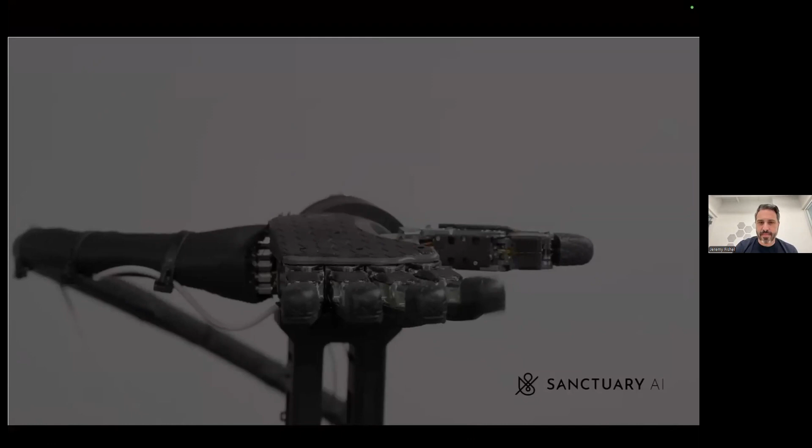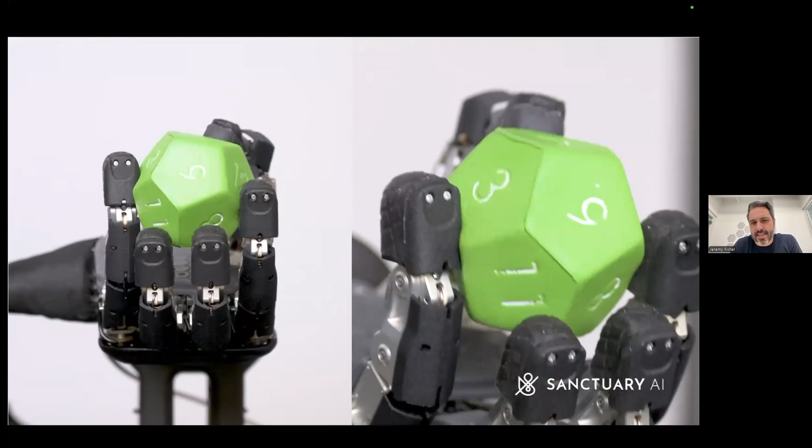We can. Okay. So at Sanctuary, we've been continuing a lot of that thread, driving durable tactile sensors and really studying the relationship between system capabilities and how those systems perform and advancing dexterity in those directions. So I have a few videos to share. This is our hand, our third generation hand. Very anthropomorphic design, very human-like kinematics, and has the right kind of power density that's similar to the human hand.

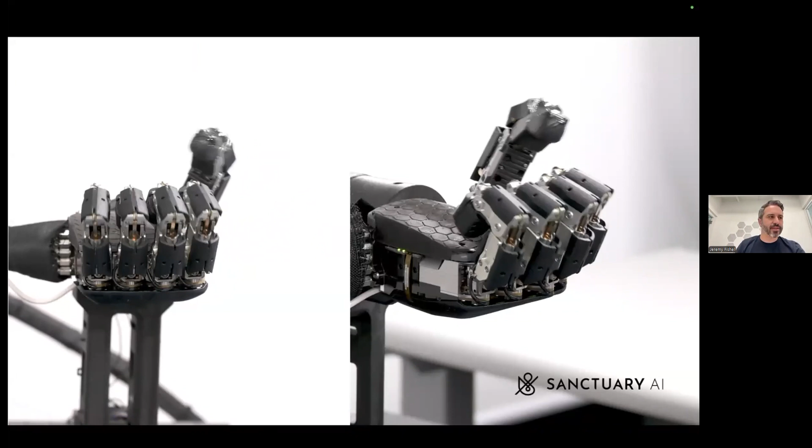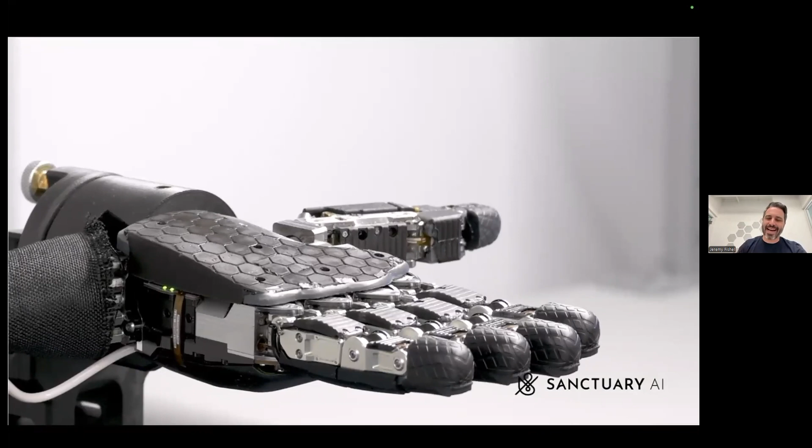Very important for in-hand manipulation, as we're demonstrating here, that some of our engineers have worked on. It can do a lot of things the human hand can do. This has been a critical tool for us to study the relationship between these features, degrees of freedom, speeds, and strength, and how they relate to performing tasks humans do with their hands. That's really a big philosophy of our company: we want to be able to do the kinds of work people can do with their hands. So lots of great stuff we can share about that.

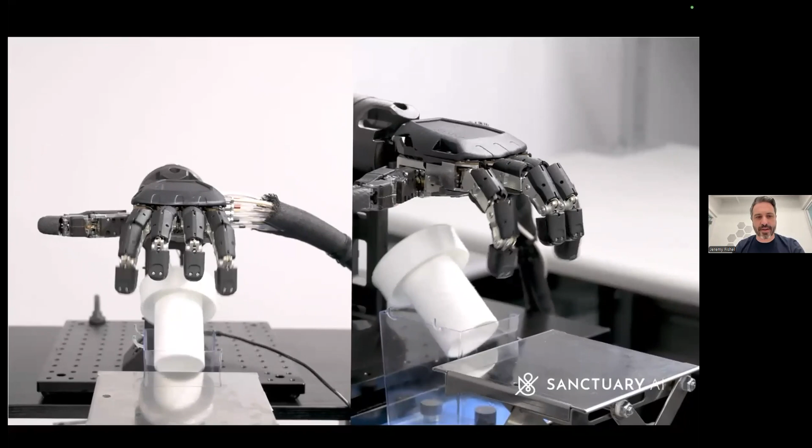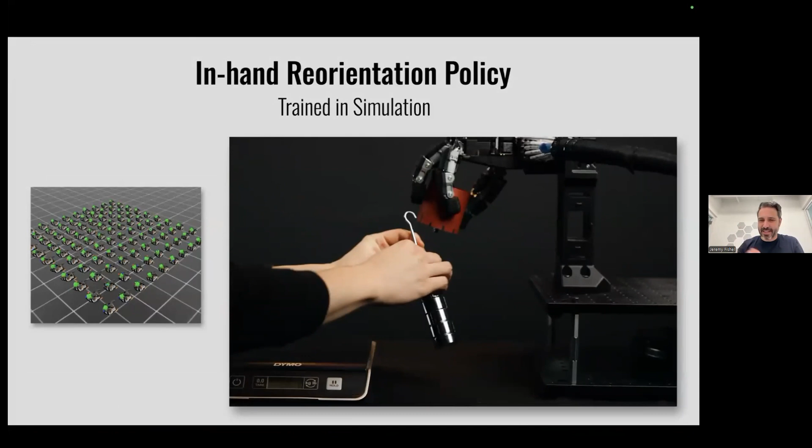One thing I think is very exciting work we've done lately, and I'm glad I get to talk over this video, is this in-hand manipulation type task. We trained this in simulation, and we're doing this rotation with actually 500 grams of weight. It doesn't sound like a lot - I remember seeing this the first time and saying, that's just 500 grams, that's not too difficult. But if you have access to weights, I'd encourage you to pick up a 500-gram weight and try this task. It's actually incredibly difficult, and I'm really proud of this performance. I can barely do it with 1 kilogram, and at 2 kilograms it's virtually impossible.

So we're really focusing on not only how can we be dexterous, but how do we have the power of the human hand? There's really a ton of conflicts in having many degrees of freedom and delicate manipulation along with power, which is something the human hand does an amazing job of.

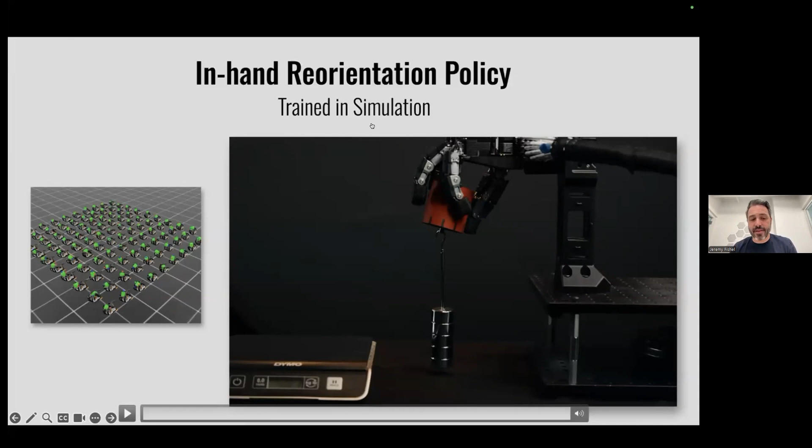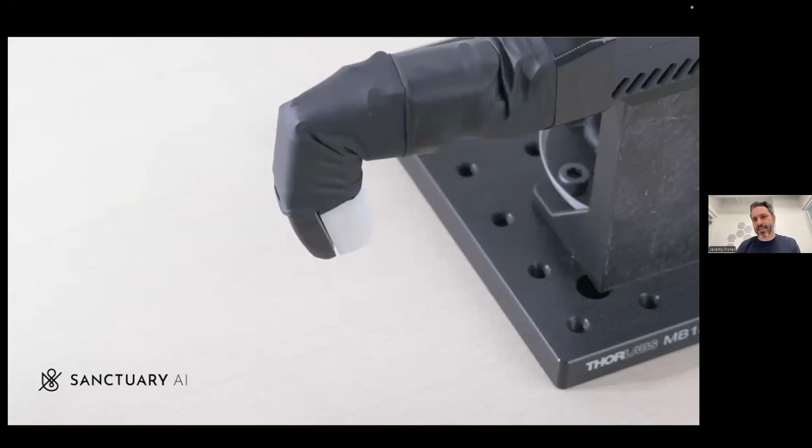Another thing, given my background, that we've focused on a lot is tactile sensing. I made the BioTac at SynTouch, which is a very biomimetic sensor. Most of the group's probably seen the green fingertip on various robot systems. While that system is very capable and can sense force, vibrations, and temperatures the way human skin can detect, it wasn't very durable. So recognizing there have been a number of amazing sensors developed that haven't been commercialized or industrialized in any significant capacity, we've really focused on the durability and compliance of these systems while still maintaining that delicacy.

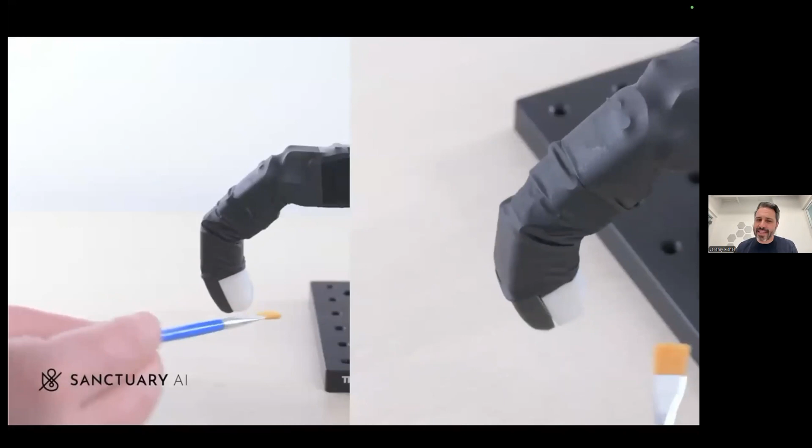So you can see we're able to delicately touch a domino without knocking it over - another task that's very difficult to do. If you close your eyes and try to touch a domino and not knock it over, you need that sensitivity that allows responsiveness too. This is one of our prototype fingers that's going to come out in a future generation hand.

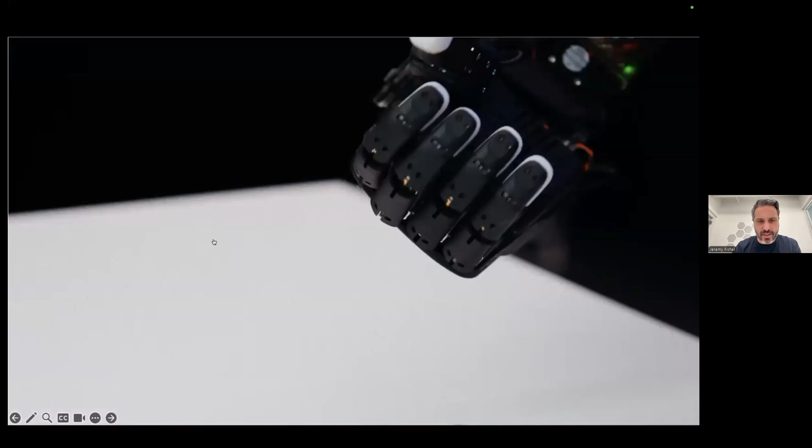We've got lots of great videos on touch. Let me let some stuff play in the background.

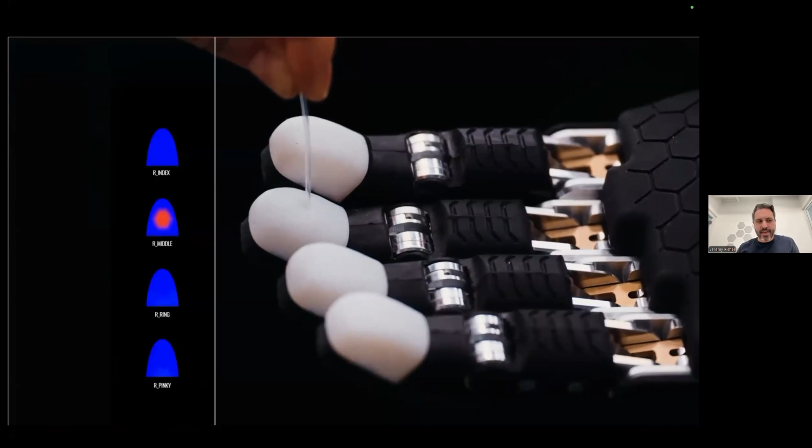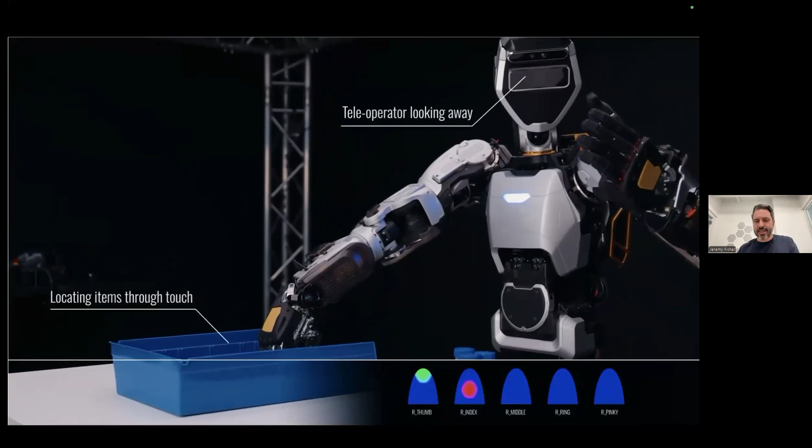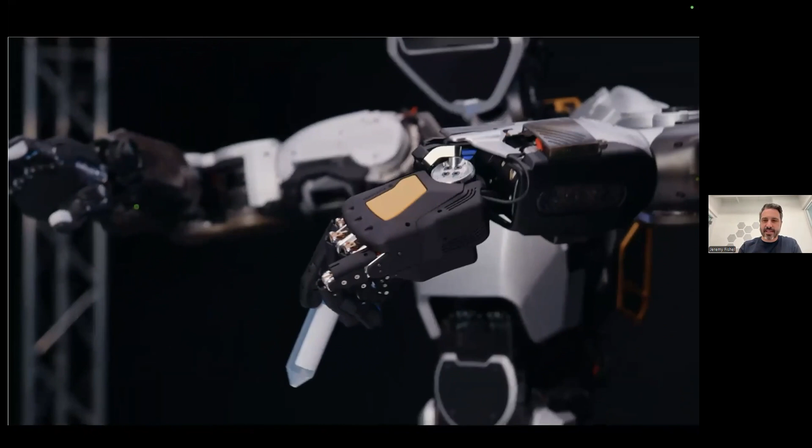As I mentioned earlier, our focus has really been on durability, compliance, and sensitivity. Touch is a very critical sense for being able to react to what we're interacting with. I've always thought of vision as a planning sense - you see everything in your environment and decide what you want to do with it - but touch is for adapting to uncertainties. Is the object slipping? Do I need to change my grip? Can I confirm my grip and move on to the next thing? Or how is in-hand manipulation proceeding? So really what we're seeing is touch is very critical for speeding things up. If you don't have this tactile sense, you make a plan, and if something goes wrong, you have to stop and make a new plan. Whereas with a sense of touch, you can react and adapt on the fly the way people do.

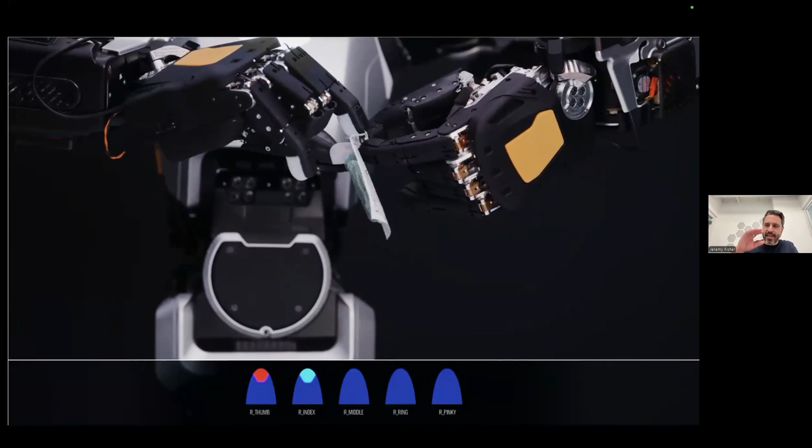Our focus at Sanctuary is on the tremendous range we see in human hands, between being delicate enough to do small things, and powerful, like the high grasp force we can attain with our hand. Getting that in one package is an incredibly difficult challenge, and that's been our focus: we want the delicate tactile sensing to react to small events, yet have a lot of power behind it too. We've got our hydraulic actuation that gives our high degree of freedom hands the power that gets much closer to human hands while maintaining that delicacy.

This is my favorite video. We've been putting tactile sensors on robots and doing teleoperation for almost six years now, and we're always seeing this immersive connection with touch. This is a reaction from one of our engineers flying the robot, the first time we put the sensors on it. She's experiencing them for the first time. I hope the audio plays.

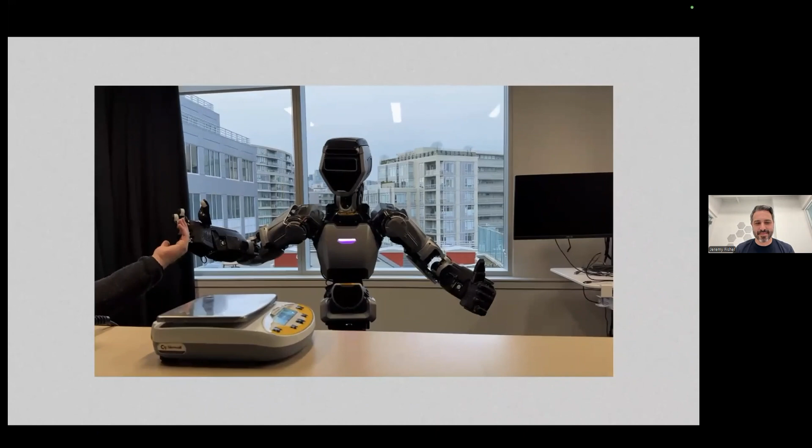Oh, I have touch sensors. Yeah, are they working right now? I can't tell. Oh, yes, they are.

That's crazy - and we see these reactions all the time. It gives this sense of connection. It makes these robots more intuitive to control and manipulate objects with, and it's such a critical sense. So we're really excited to be working with a company that shares our vision here: we need touch, we need power, we need these kinematics to replicate all these amazing things our hands can do.

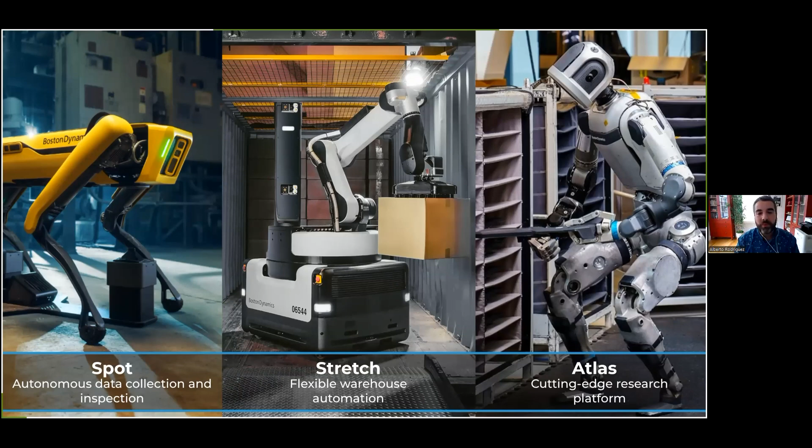All right, so let's see, just a quick one-slider background of Boston Dynamics. There are basically 3 projects that dominate most of what Boston Dynamics does. Spot, which is a product that you can buy, and it's mostly focused on autonomous data collection and asset inspection. So you can think of Spot as a robot that walks around, let's say a factory, it could be other environments. It just records what's happening and it sends warning signals when something looks off, for the most part.

Then Stretch is also a product you can buy, and it's a robot that is focused on case handling. Today, it's mostly focused on the deployments we're doing on truck unloading, but extending the range of types of workflows that it can handle. And then there's Atlas, which is what I'm going to discuss a little bit more today, which is our frontier research project, looking in the past mostly focused on mobility, and for the last 2-3 years transitioning into mobile manipulation.

And before going into more detail of the type of research that Atlas is doing in dexterity, I just wanted to have one slide as to why dexterous manipulation, with just one case example of mobile manipulation in manufacturing.

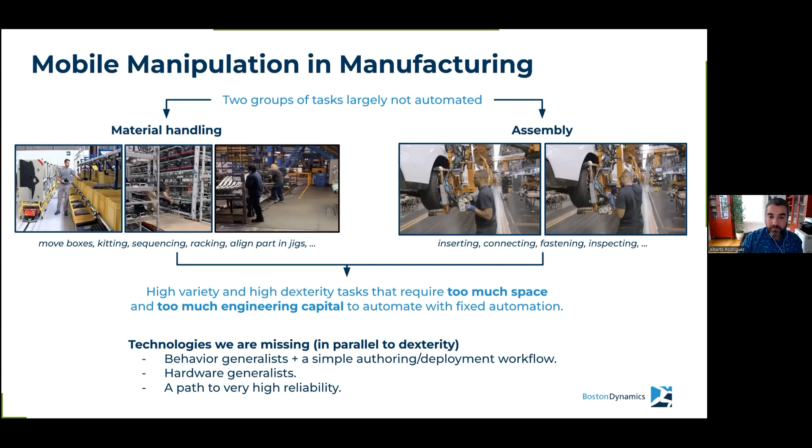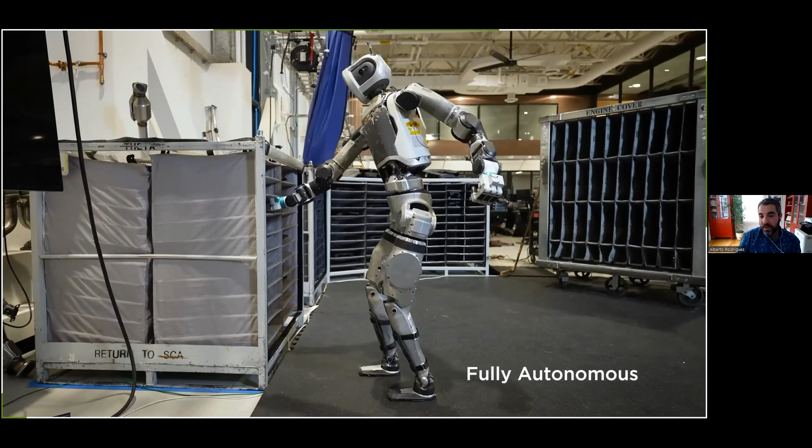So what is Boston Dynamics doing in this space? Here I just put a video which you might have seen on YouTube. This is Atlas executing one particular workflow for material handling. This is called sequencing. There's these input fixtures with different varieties of parts, this one is an engine cover, and this is a fixture where it's inserting it, where each one of these slots gets associated with a car in the assembly line in order. So this workflow is responsible for making sure that the order in which the parts are inserted in the output fixture that will be rolled into the assembly line is exactly the same as the cars that are going to be assembled in order.

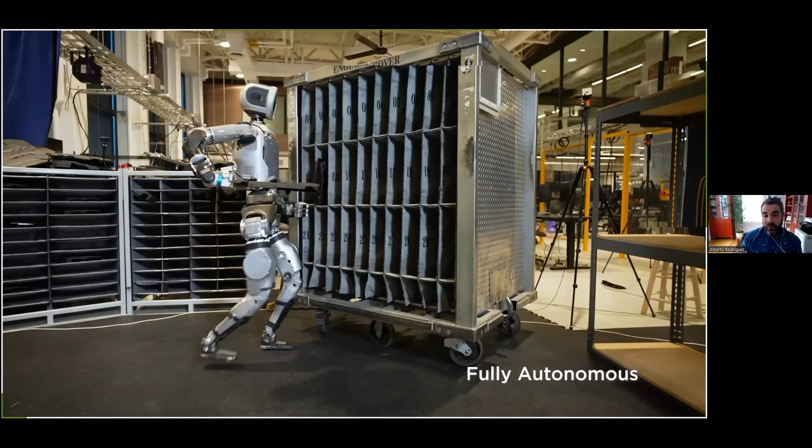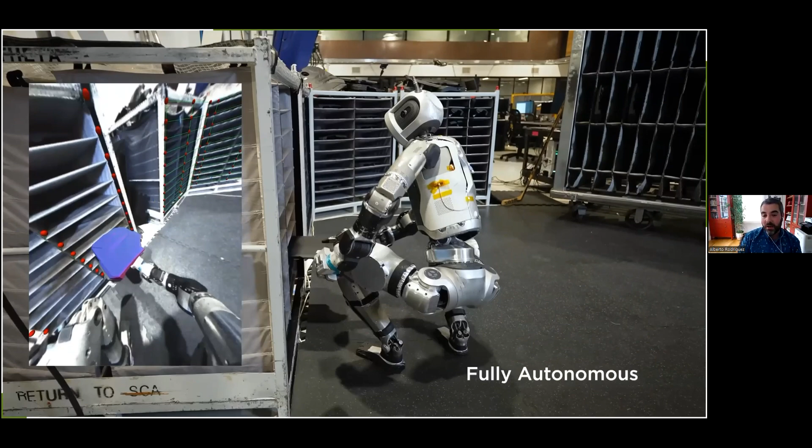So we've been building behavior architecture that is capable of executing tasks like this, pick and place behaviors with a certain degree of reliability. But really what I wanted to discuss today is where we're going next, where we think the next push is to increase the generality of the behaviors that Atlas can do, in particular in the space of dexterity.

For the most part, I would say there's three main threads that we're pushing on: simulation at scale for reinforcement learning, whole body teleoperation for imitation learning, and grippers with tactile sensing. I'll go into just one slide on each one of these.

On the gripper side, just to follow up from Jeremy's presentation, we've taken a slightly different approach. Instead of starting from a humanoid form factor, we've been interested in growing incrementally the degree of dexterity of the gripper as we recognize that we need more dexterity. At the same time, we're trying to maintain a certain degree of reliability and strength to support the kinds of tasks we want Atlas to do with high loads, heavy objects, and high repetition, for example data collection at scale.

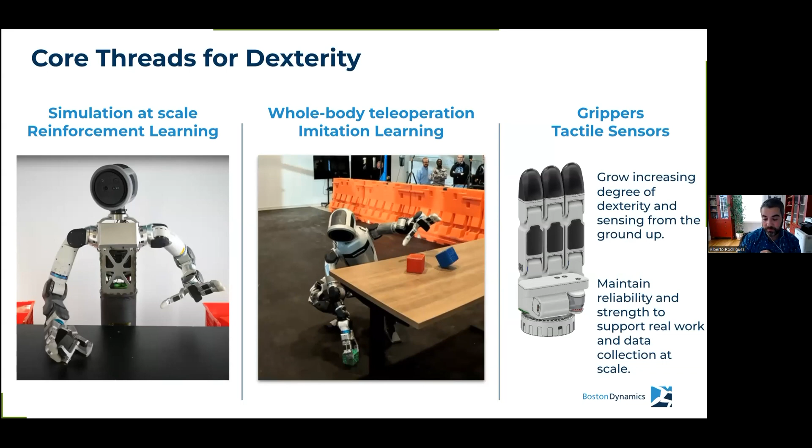Here's one slide on the work we're doing on reinforcement learning. Here's a demonstration of a policy trained in simulation that shows significant generalization to grasping objects. None of these objects showing up in front of Atlas were part of training. It's been trained on hundreds of objects, but none of these were part of the training. And it operates directly from RGB stereo, so there's no prior knowledge of the geometry, appearance, or mass of these objects. It all comes directly from either visual or proprioceptive feedback.

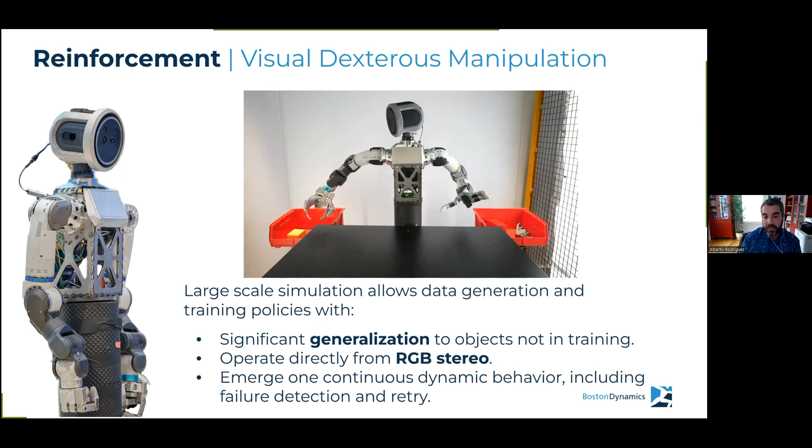One of the things I am particularly excited about is that through training these policies at scale, we do see the beginning of emergence of continuous dynamic behaviors that do not separate between pre-grasp, grasp, and lift. Things like failure detection and retry emerge when you push these at scale. So that's one core thread.

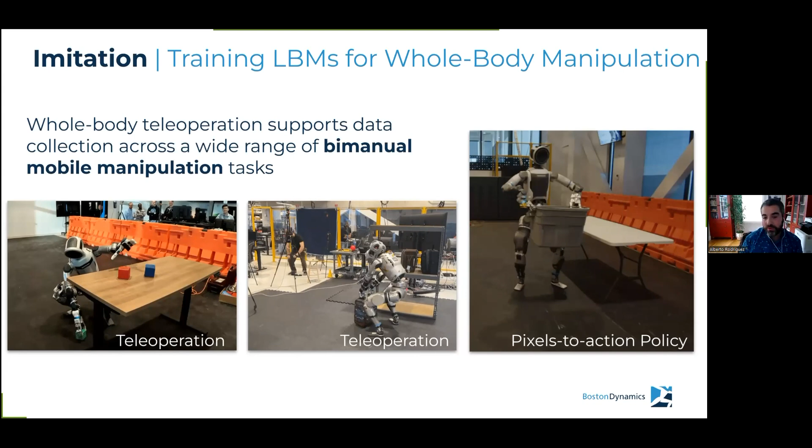The second thread, which we think is essential to make progress on dexterity, not just at the hand level but at the whole body level, is enabling whole body teleoperation that supports data collection across a wide range of bimanual mobile manipulation tasks, including things like crouching to pick up something from the ground, or lifting something heavy using both hands at the same time to do regrasps or lift a heavy object. Here I show two examples: on the left, a teleoperation system, and on the right, an example of a policy trained from data collected from that teleoperation system.

All right, I think that's my last slide.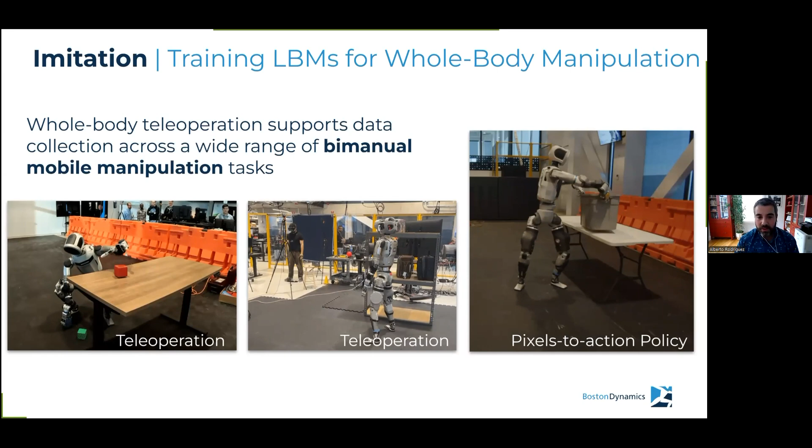Luis, Apptronik has been in the news for its recent success in raising $350 million, and more broadly there have been enormous investments in humanoids in recent years. We would love to hear more about your work within this space.

Thank you, Brenna. Thank you, Kevin. Pleasure to be here with esteemed colleagues. Indeed, Apptronik has been a story of success and good timing. I'm very pleased to be here with other colleagues that are equally, if not more, successful, all of us pushing this wonderful market forward.

So, if you don't mind, I'll share some slides. You might know me for having spent the last about 25 years in the area of whole body control of humanoid robots, both as an academic and as original co-founder of Apptronik, where now I am somewhere between business development, fundraiser, and innovation advisor.

The company indeed started in 2016. It started selling components - that was our vision at the beginning, but clearly margins were low. About 4 or 5 years later, we decided that systems, in particular humanoids, as strange as it sounded at the time, was going to be our market.

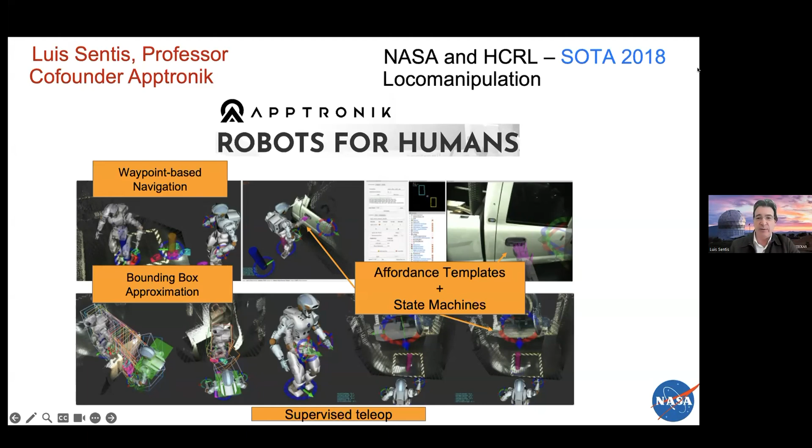It starts with NASA, Johnson Space Center in particular, where whole body manipulation was the most important accomplishment that we could have out of the DRC. What we see here is movies and renderings.

Pre-COVID, about 2017, 2018, they are highly scripted, nonetheless pretty impressive. Using affordances, there's not a whole lot of autonomy except maybe some of the walk, semi-autonomous. But that was already a feat.

One important thing to notice is that out of 33 runs of this task, it was opening a door of a car, finding a bag and zipping it. No, it was not unzipping it. It was putting it in a containment vessel in case they had a bomb, and so on and so forth.

We had 33 runs, about 30 minutes each of them, and we were successful in about 57% of them, which is fairly low. The rest of them were failures due to falling and unrecoverable walking situations, and you can go into state estimation drift and so on and so forth.

So failure rates, that's again 2017, 2018, were high. I'm gonna argue that they're still high today. And companies like Apptronik and others here are here to respond to these, turning this into a product. And turning this into a product means that we can operate with way more reliability.

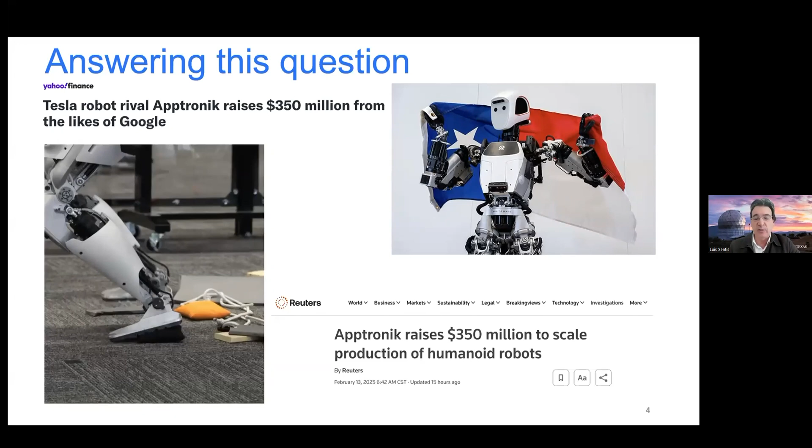A lot of the product and engineering is put now on testing, verifying, deploying, robustifying the algorithms of all sorts, whether it's machine learning algorithms or optimization-based algorithms. And I believe that it's going to make things much more successful.

Why is there excitement? Although they have limited manipulation capabilities, even tote manipulation, totes are the kind of things that you see here on the right, on the bottom right side. Those are huge. Box manipulation are huge.

And we see a lot of successful unicorn companies, not only in the humanoid side, but also on the industrial arm side, companies like Contoro and Dexterity and Covariant and so on and so forth.

Where manipulation really takes real shape is seeing the demographics and seeing that we're going to have about 1 billion people age 80 plus with mobility problems. That makes home really, really appealing.

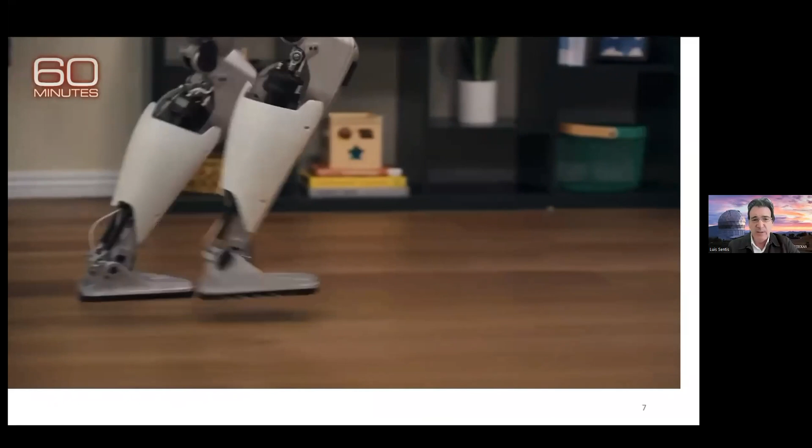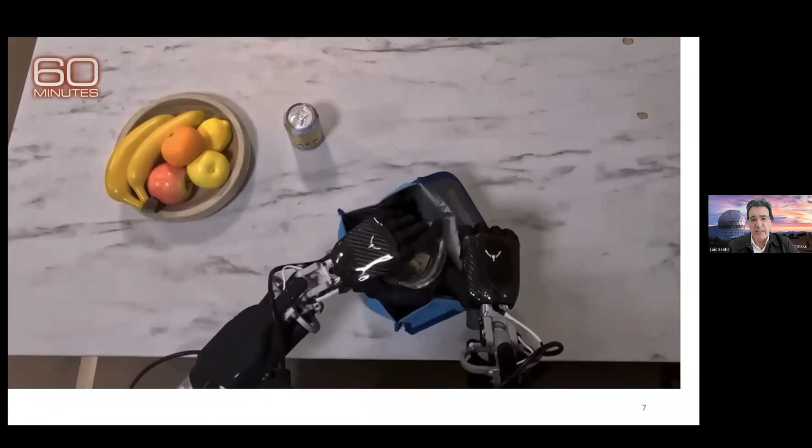And at home is where we see multi-finger manipulation really thriving. This is a recent video in 60 Minutes with Demis Hassabis and our partnership with Google DeepMind. And you can see that focus and that idea of achieving multi-finger manipulation as a frontier in humanoid robotics.

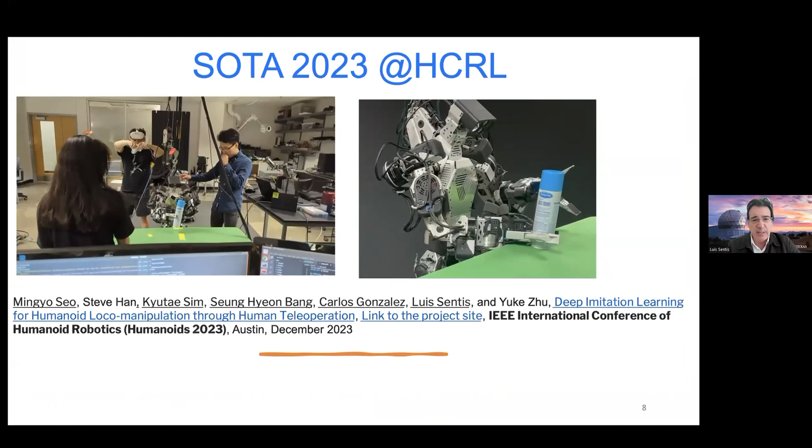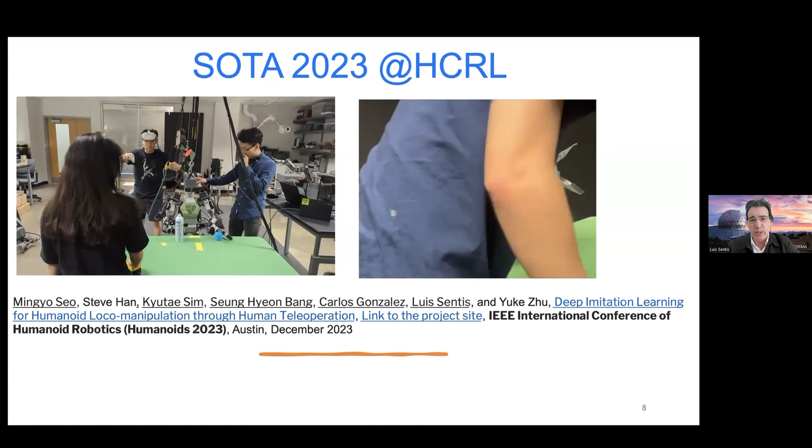Going through the time history, and I'm now switching a little bit more to my academic role. This is research we conducted with Yuke Zhu, who's now leading the GR00T project at NVIDIA, on using supervised learning, imitation learning, with any sort of interfaces and being able to achieve pretty successful multi-arm, dual-arm manipulation, long horizon or mid-horizon kind of tasks.

And that was achieved by a combination of—often supervised learning or reinforcement learning is criticized about the lack of generality. They have robustness, but not generality. And in this case, we create abstractions.

They are not necessarily aware of the entire embodiment. So we have on the left side a supervised learning approach, and then on the right side, the kind of a more classical optimization, whole body control approach. By combining both of them, we achieve robustness and cross-embodiment learning.

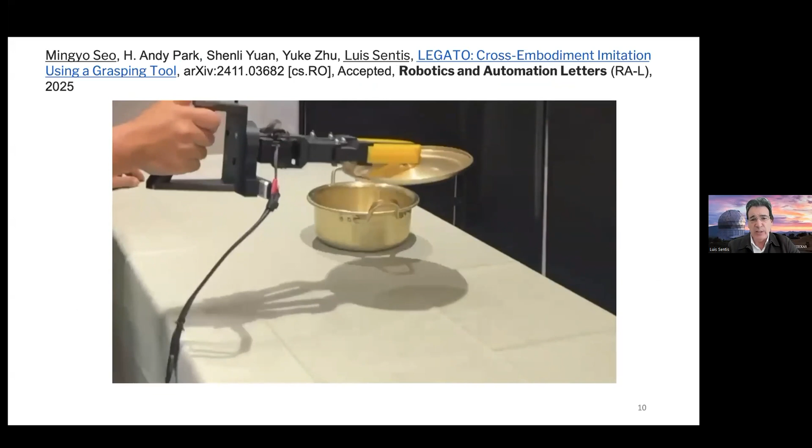Here is our extension of using some simple tools that we are seeing now becoming more popular. These are 3D printing, low cost. We actually open source it. There was a collaboration with Boston Dynamics AI Institute, and we gathered data sets in a space, in a representation space that can be translated to different embodiments.

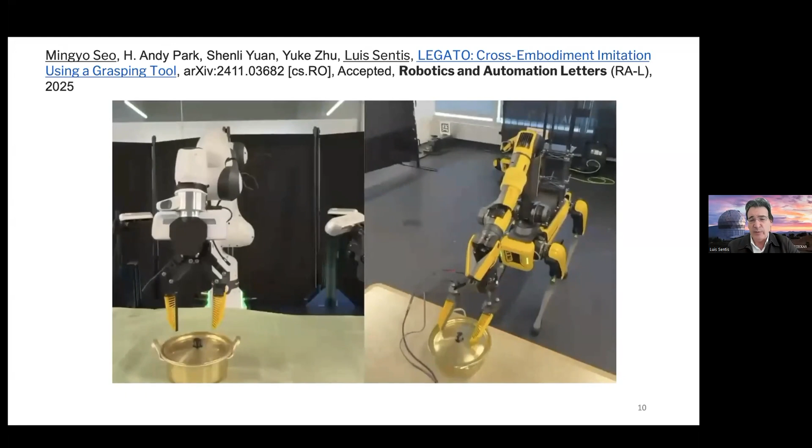So you take out the parallel gripper, and now, with a few demonstrations, you've passed on the skill to other robotic systems. This is our latest work with clients that I cannot mention, on exploring fingernails.

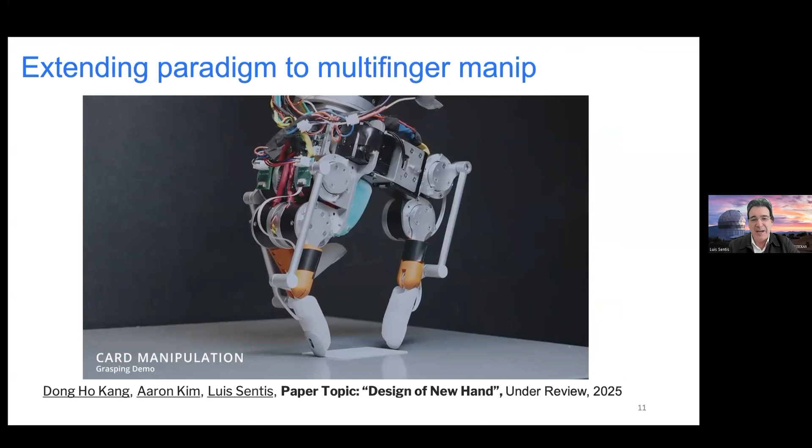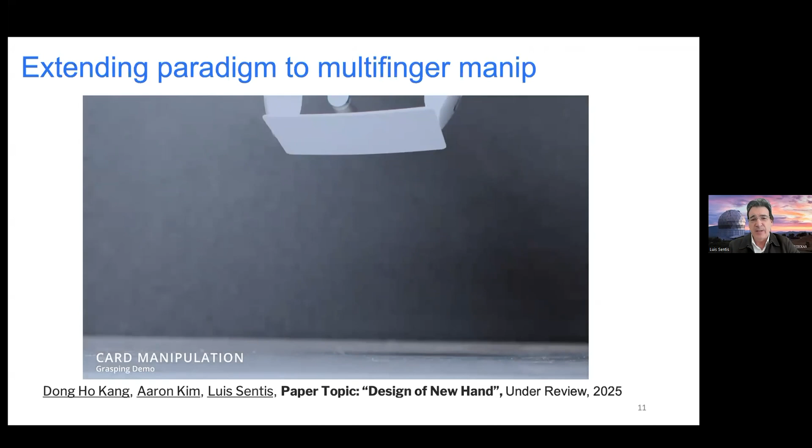We have a high belief that fingernails are going to play an important role in tasks like cooking, managing office work, processing things that are a little bit more exotic, and we're really excited about the combination of soft and hard surfaces for manipulation. You will see more of that fairly soon.

That allows us to cover more of the grasping taxonomy and the fine precision in the manipulation of other types of objects. So we're making a case here for multi-fingers.

And perhaps the last couple of slides is that manipulation—we have this home-industrial dichotomy, but maybe there's also a rehab storyline. Here's a partnership with RoboLegion, one of our favorite companies as well, on grasping human limbs.

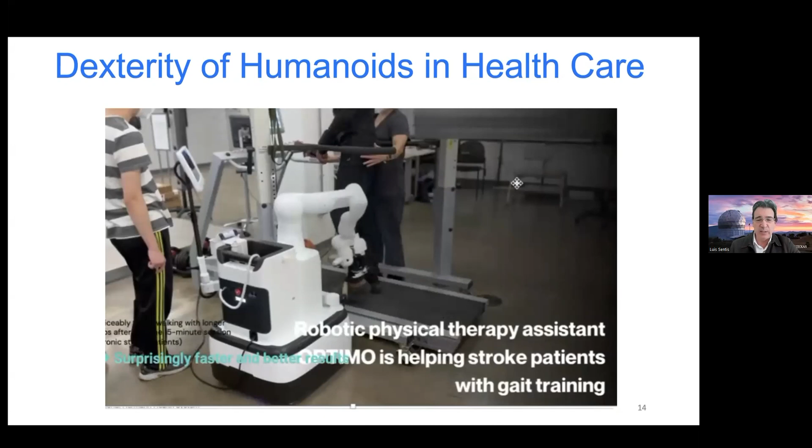And in this case, we've been exploring the use of these multi-finger arms. They have quite a bit of force control and tactile control and series elastic actuation. They have cameras, and they have also speech recognition and speakers as well. So you can talk to it and ground the movements, the dexterous movements, into words.

Well, safety is another story. We're partnering with another corporation called MITRE for safety. But that's pretty much it.

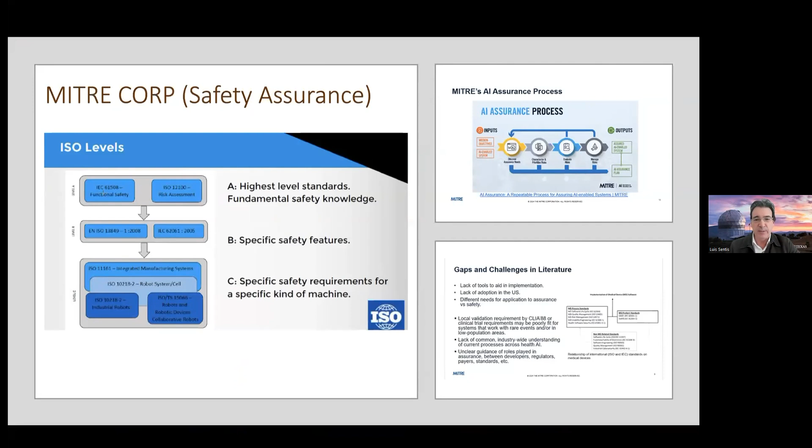Thank you, Luis. Very impressive trajectory.

So, Luis, perhaps you can get us kicked off with the first question. What are some near-term or long-term applications for humanoid manipulation that you expect will have groundbreaking impact?

Well, I think I still believe that the killer app continues being this millennial problem that from the Chinese to the Turks to the Jewish communities have dreamed of the multi-purpose robot at home, and that is going to be it.

So sometimes people argue that humanoids is a solution in search of a problem. I want to say that no, it's a problem in search of a solution. We all want to have the killer app of at-home robots, and we're seeing a clear move by the Metas and the Google DeepMinds in that direction.

The reason we are seeing industrial, logistics, retail humanoids nowadays is because it's easier to do B2B business development, and then penetrating the home market is a little bit more difficult. Morgan Stanley has a study that the whole human labor market is several dozens of trillions of dollars, and the pieces of it that humanoids can take are on the order of several trillions of dollars.